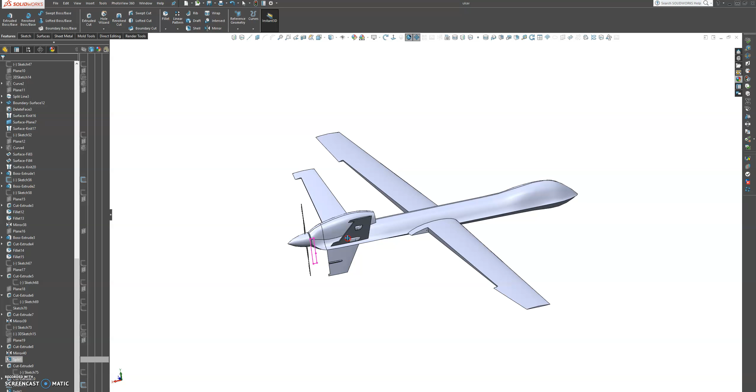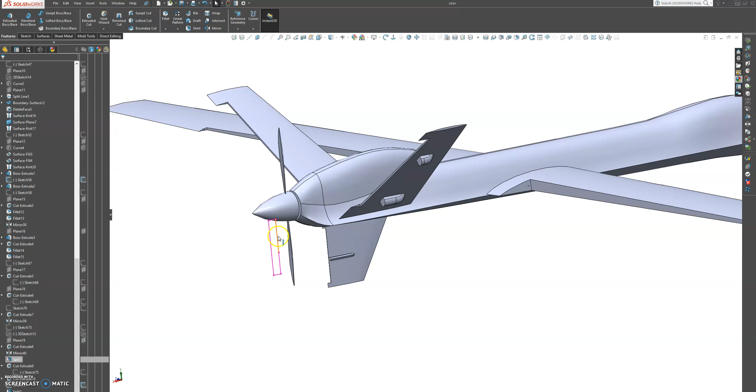Created our own individually split bodies, and then we finished off with creating the split bodies for the rotor flap. Let's hide this sketch here. And then I did extrude this into this body.

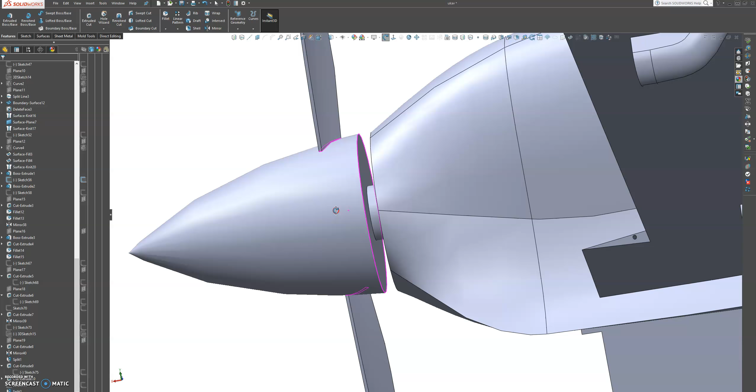However, we're going to do something different because we want this to be able to spin around its axis when we get to animation. So we're going to sketch on this surface quickly, and sketch on that one, and then grab a circle and get that point there. I'm going to bring it out bigger than that one was originally, and then go to extrude and get that piece of body off from there.

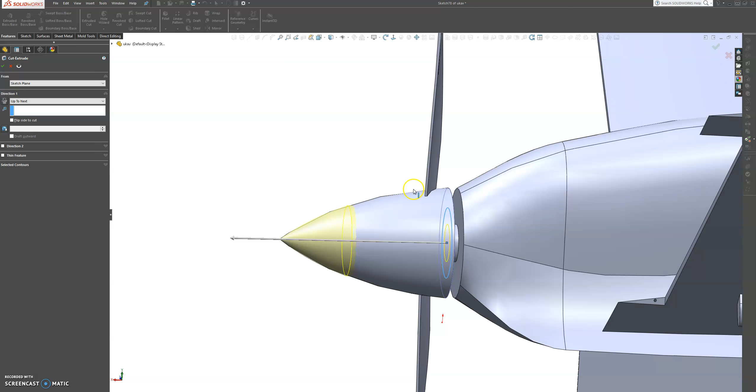So we're just going to go up to next. Reverse, that's good. Let's see. Oh, we went all the way in, didn't it? Let's come out from this. Okay, so let's do it again.

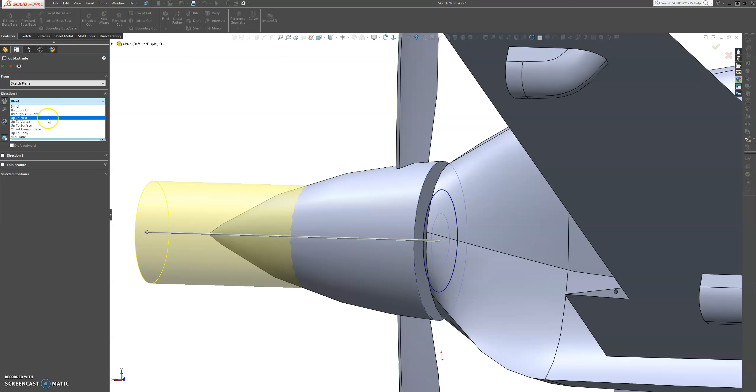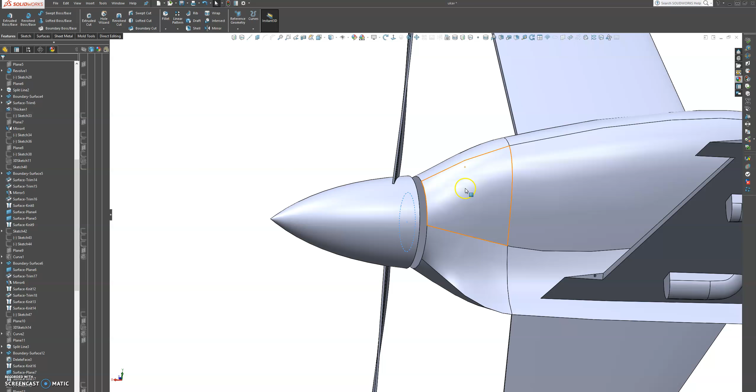Let's go to cut extrude, and we go up to surface. We're just going to go up to this surface here. That is good. Up to that surface, and then press OK. That's good.

And then we're going to come back over here, and then create another sketch on this one. Let's come out here. Let's come back in here. So let's create another sketch. Let's grab that point, so that's the point we're looking for. Come out about that much.

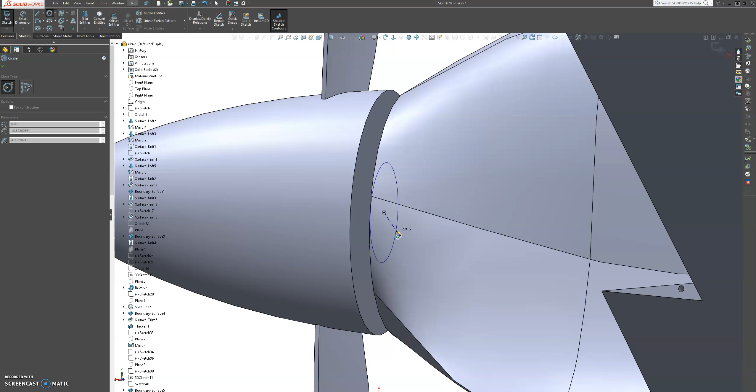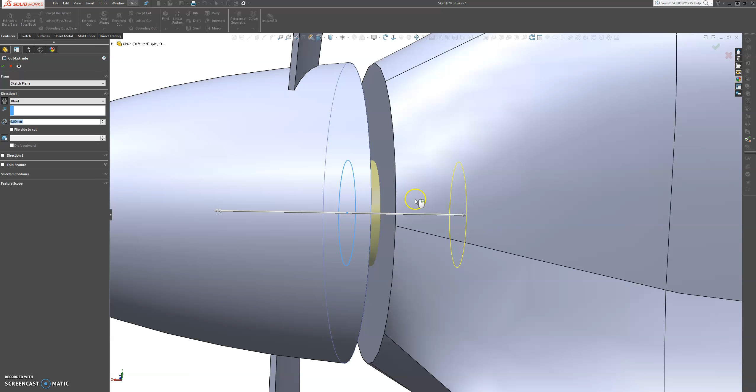And then we're going to extrude cut, just so we can get our hole to create our mates. So we're going to go in about that much. Okay.

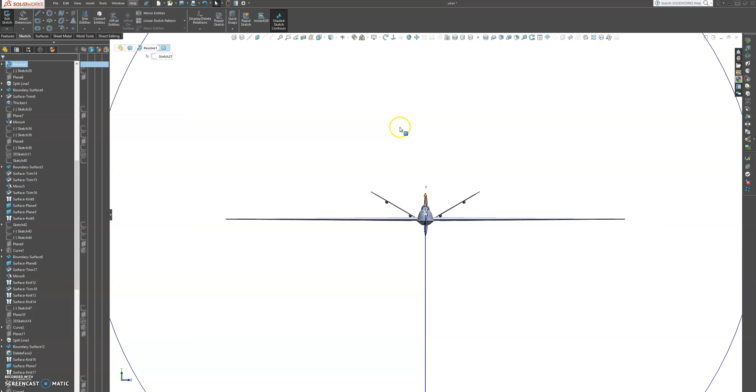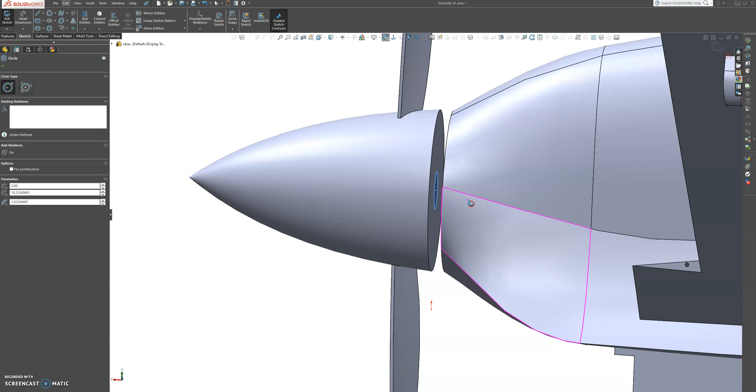Right, and then we're going to make another sketch, and sketch again on this face. It jumps out. Come back in here, a little bit out, and let's grab that point again. So just hover over the edge, and it gives you that perfect center point. And we're going to come about that much, and that's going to be perfect for creating our coincidence.

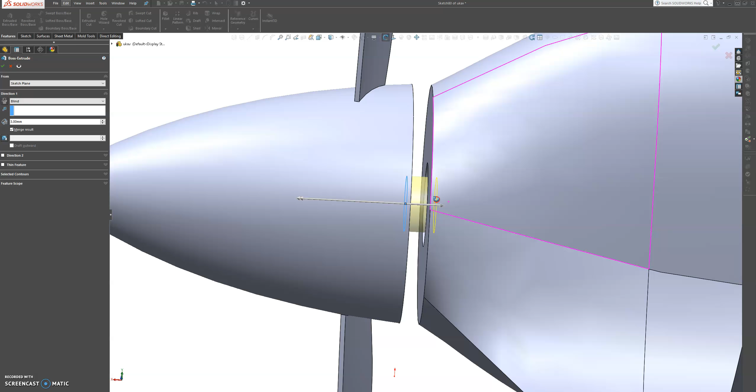Okay, and then we're just going to go to extrude, and then let's come back about here, and that's good enough. So press OK on that.

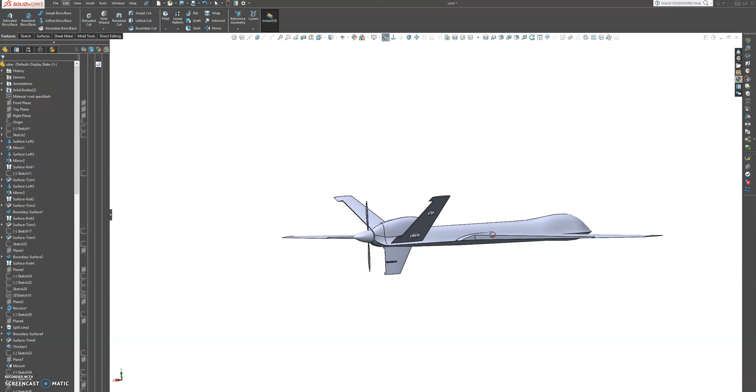And now we need to create into a separate body. So let's sketch on - I don't know if we have that kind of plane - that is a bit more over at that one. So let's create a plane quickly here before we head over to assembly and check our flaps if it's working. So we're going to grab a front plane, flip the offset, and then raise this out about that far. That's good.

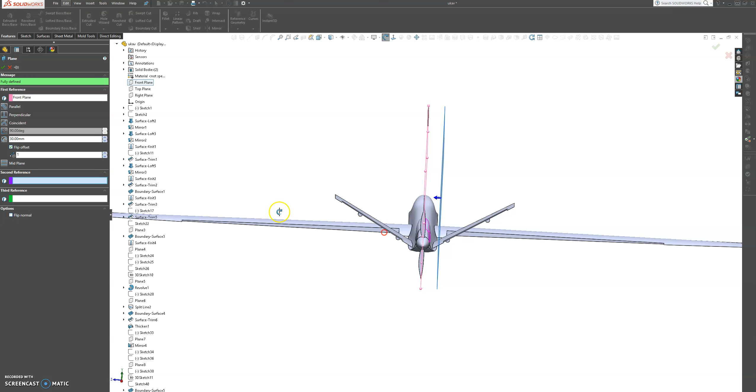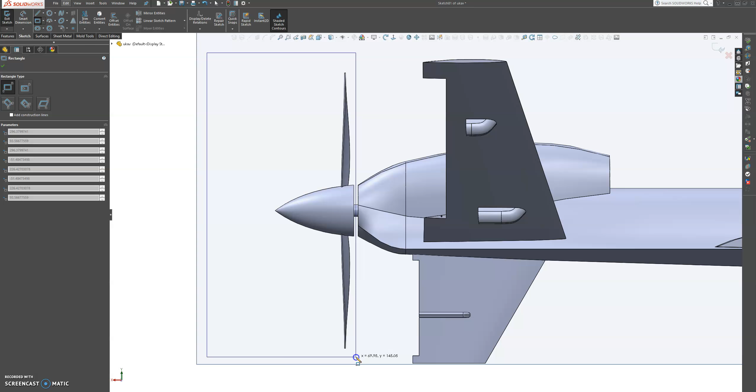And then we're going to come in here and make a sketch on this one. Flip it over - doesn't really matter at this point, but I like to sketch from this end to this end. Somehow it's comfortable for me; for you maybe from this end to that end, but you'll figure it out. So let's choose a corner rectangle here, and then sketch from here, and go all the way down here, something like that.

Okay, and then we're going to split these bodies. So let's grab split. We already have our split tool determined, so we're going to go to cut bodies.

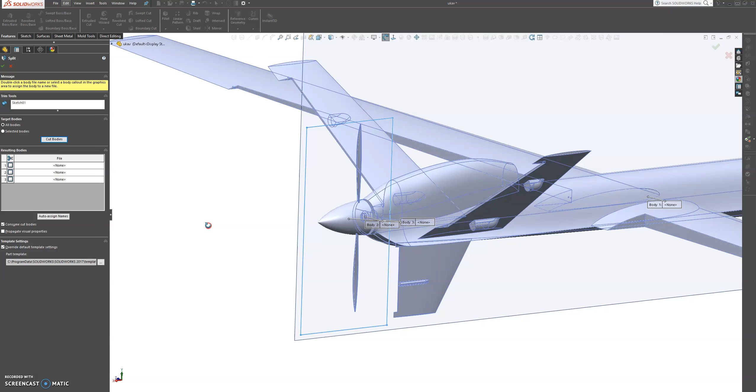Okay, and now we just need to select our bodies that we are going to cut. So we're going to need one - no, that's the plane. We're going to need number 2 and number 3. Actually, we're just going to need number 3, and we don't need number 2.

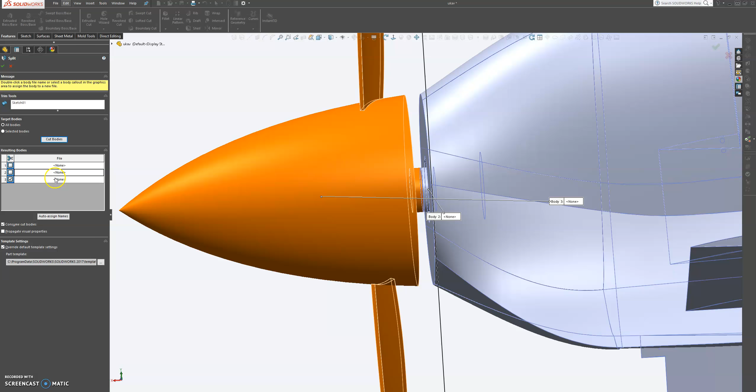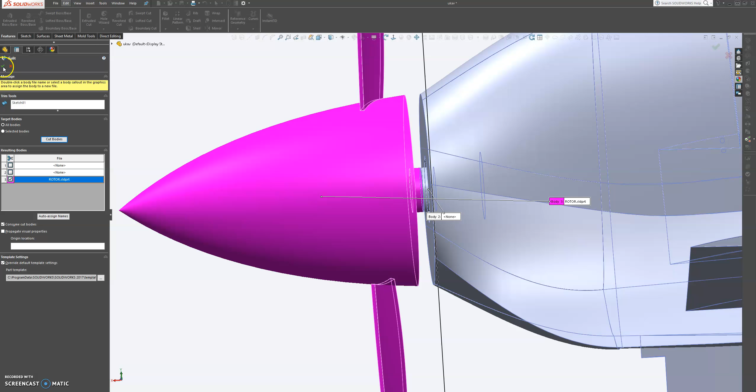Right, okay, so let's name that the rotor. I'm going to save it to desktop. Save. Okay, I'm just going to check that. And it will consume the body, but we can always bring it back.

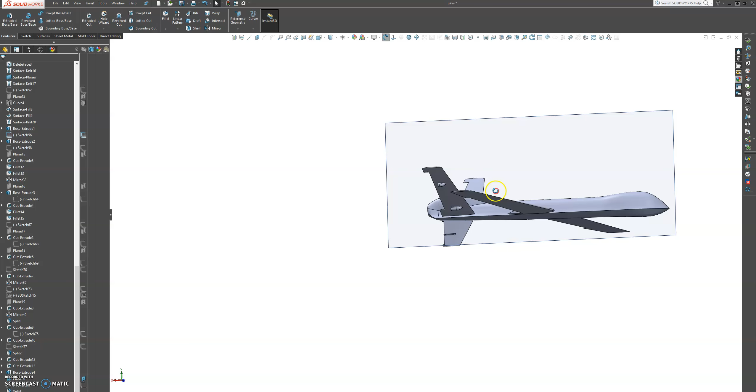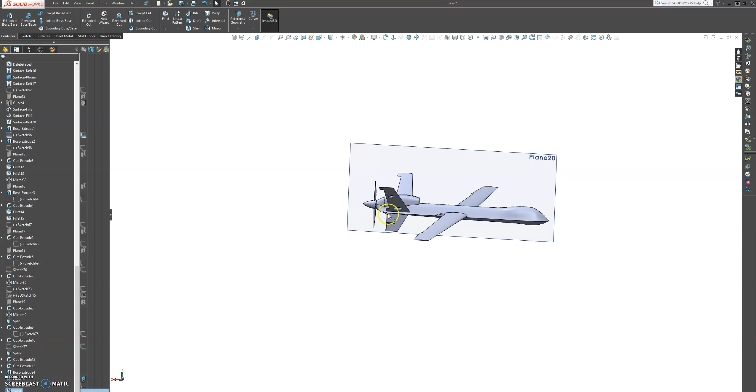Okay, so that's created. Let's hide the sketch here, and hide that. So if you want to see the rotor here, you can just go back to split line and then edit, and then you just check 'do not consume the bodies', and then press OK on that. And this will update it. Okay, so now you can see the rotor. Alright.

But when you head over to assembly - before you head over to assembly - it's a good idea to consume it, and when you come back you bring it back so you can see your rotors. Okay, so what else can we do before we head over to assembly?

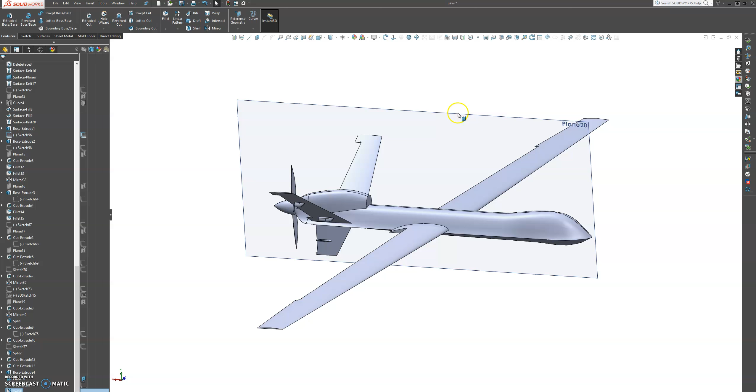Let's head over to assembly right now, and when we come back we continue with our further designs of hollowing out our turbine and adding the additional moving housing, mechanical housing, the antennas, communication devices, and all the other bits.

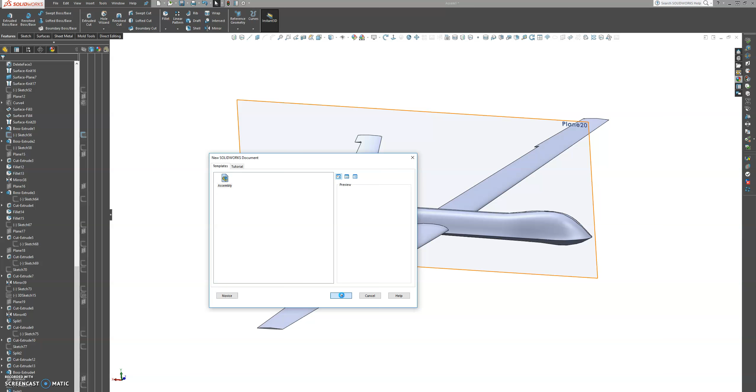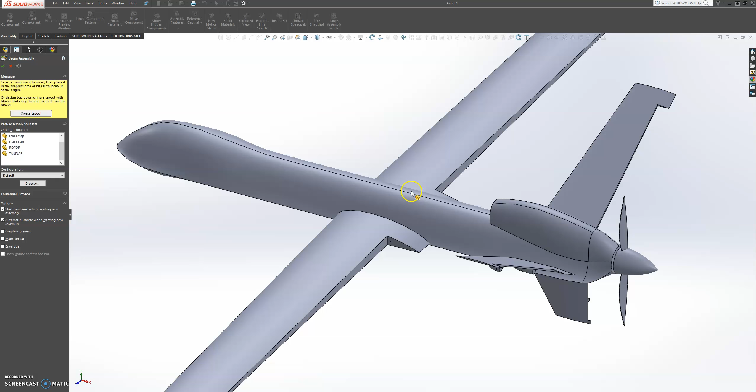Let's grab our plane. You see the rotor is present because we didn't press consume, so let's exit that and jump back quickly. Don't save.

Let's go back here to split line, let's edit this one, and then we're going to go consume the bodies. Press OK.

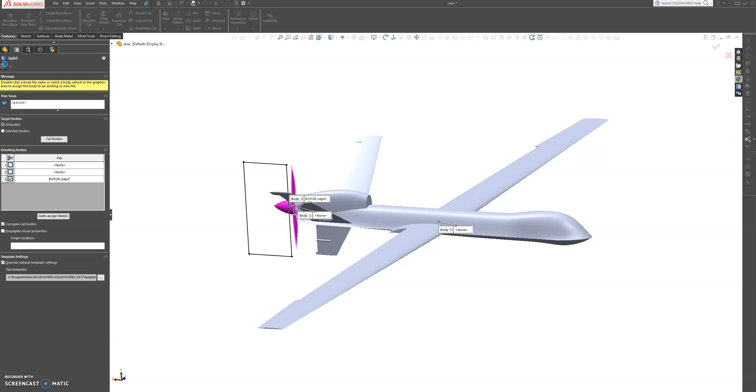Alright, perfect. Now let's go back to the assembly. So make assembly, and in the assembly you can create some minor animations. It's not really an animation software, but you can do some good animations here.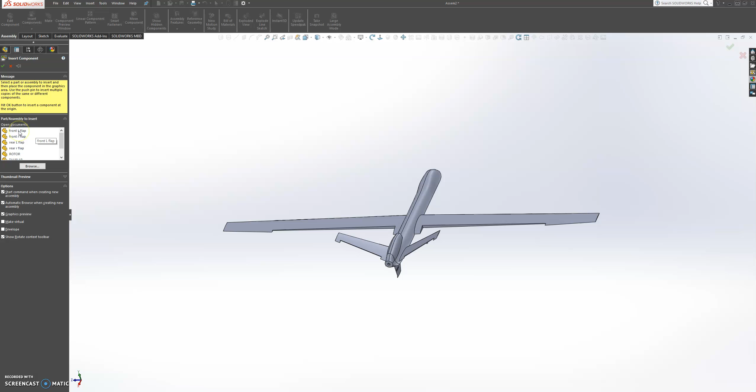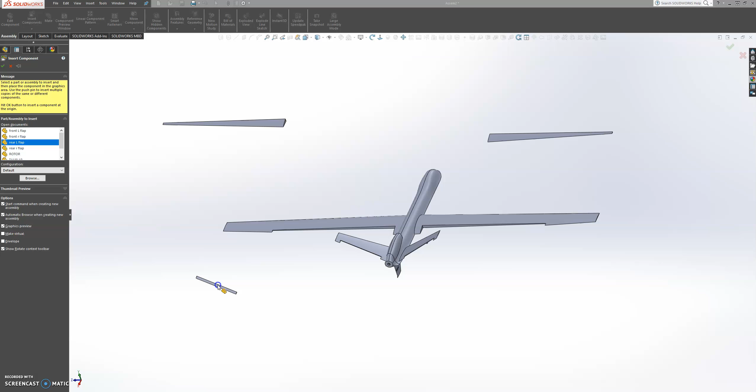Let's grab our drone, and then let's grab our flaps. So insert components: front left flap, front left flap, leave it there. Then insert components, front right flap. Then insert components, rear left flap, which goes here. Insert that, and then rear right, which goes here.

Insert component. What else do we have? We have the rear, we have the rotor comes back here, and then we have the tail flap, which will go over here.

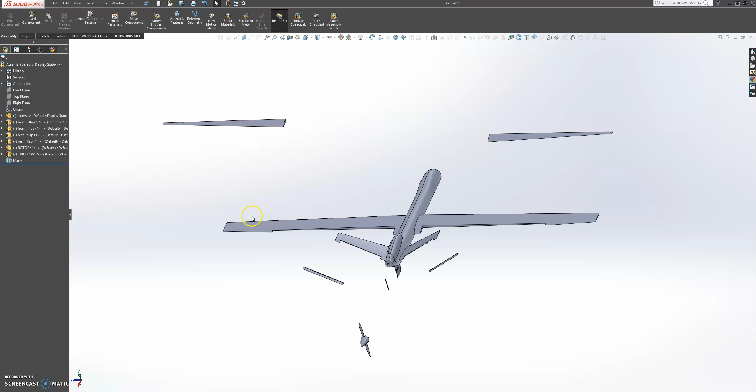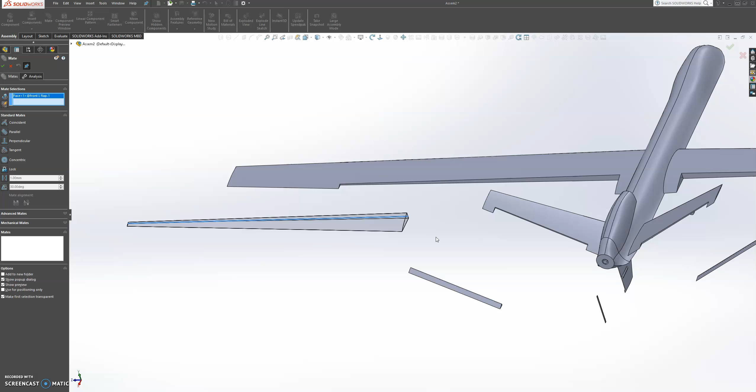So let's start by adding these mates. Click on here to add these mates. Let's clear that, it's selected by accident. Let's choose this inside circular face, and let's choose this over here. Wait for this to show up, and then we're going to press OK on that.

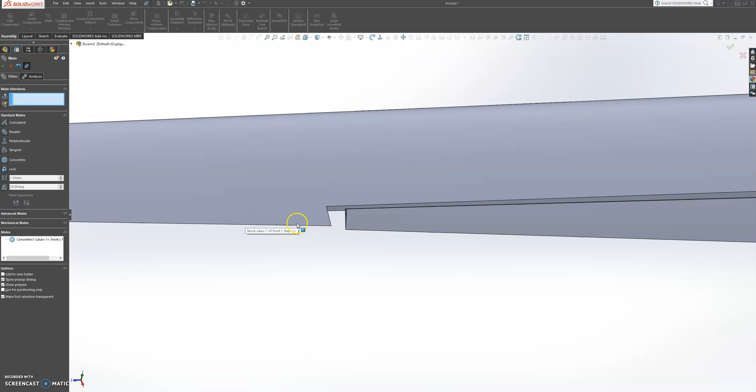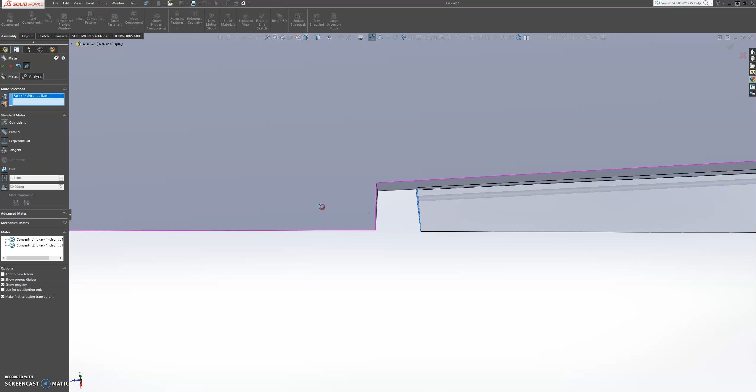Let's bring it a little bit closer, and then add our mate to this end. Let's turn it a little bit, yes, this end, and then this hole here. Press OK on that. And we're going to add our last relationship to this face and this face. Press OK on that.

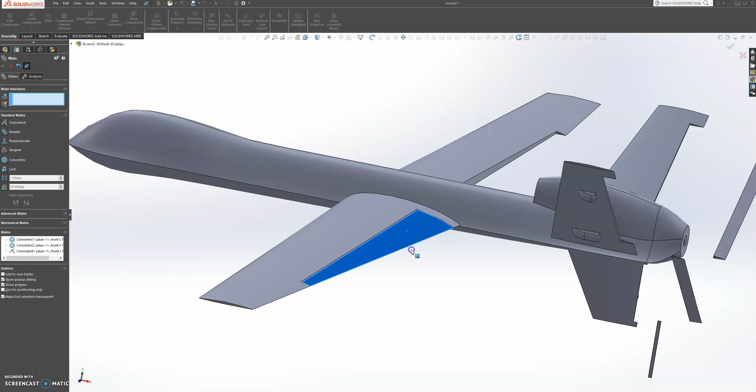Let's check if this flap is moving up and down. It's moving perfectly, up and down. Let's leave it straight in that, and then we're going to make the same thing for the other side.

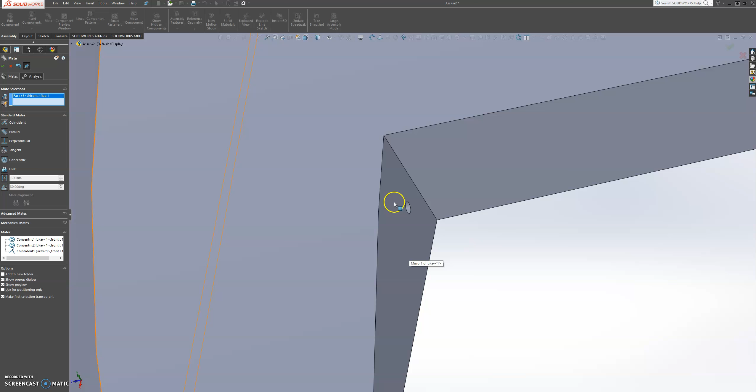So let's add our mate to the circular profile face, you can call it that, and this one here, this face. Press OK on that, and then move it a little bit to its position.

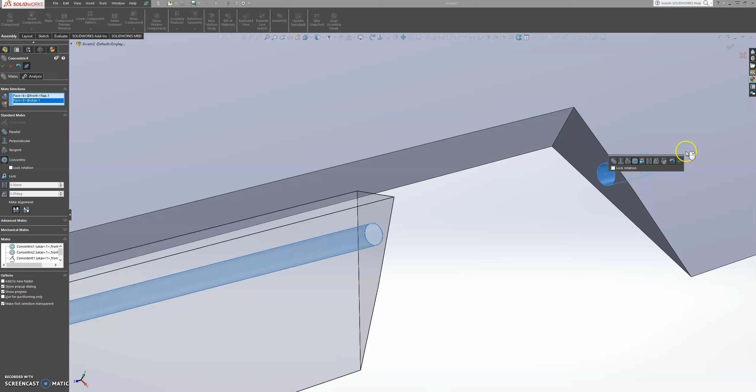Let's go in here and quickly add our relation mate to this and this, then press OK on that. Our last mate to this face and that face brings it into place. Press OK on that, and then check if it's working.

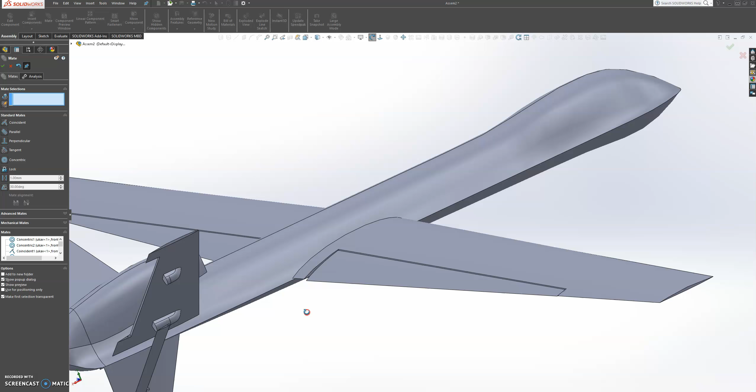Indeed, because it's perfectly designed. Let's align this too. Now we're going to add our relations to the rear flaps.

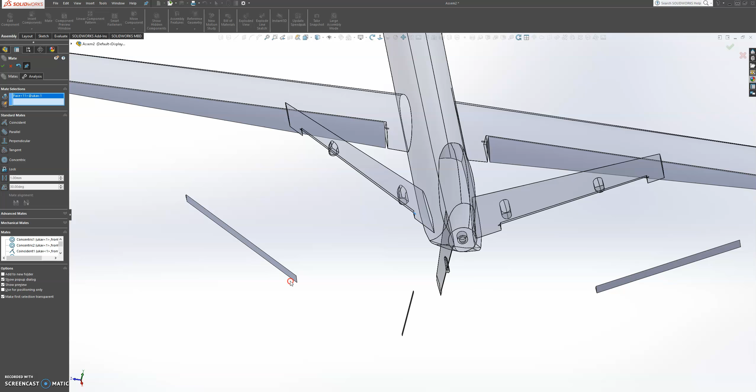So again, same thing. We're going to add our first mate to this circular profile and this. Press OK on that. Okay, where did you go? Right there. Okay, so let's move it into position.

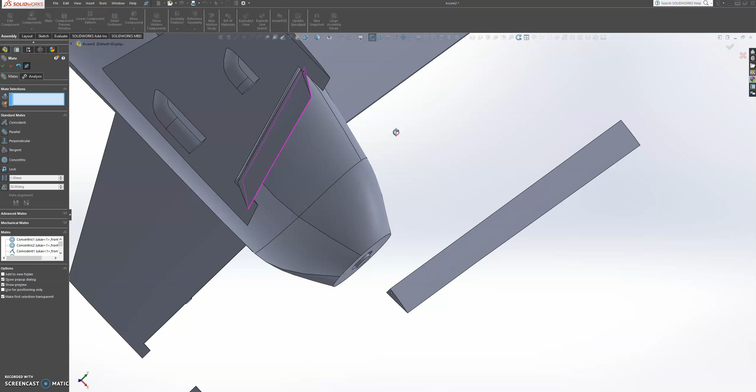It's working already, this plane wants to fly away. So let's choose this profile. Let's see if we can have a look in there. It's this profile, just OK on that.

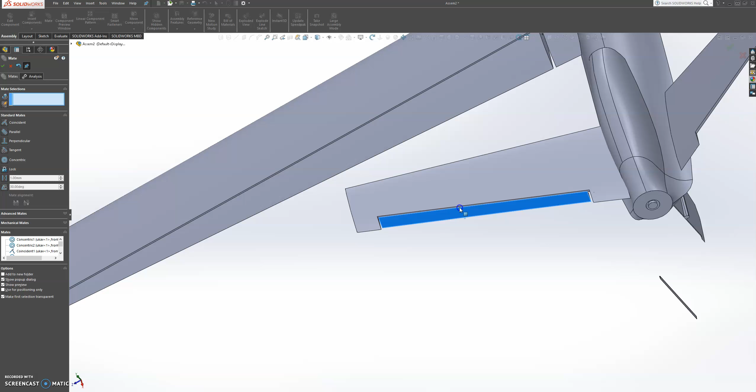Right, so this flap is moving. However, we need to create some good relations. I think we should have cut it straight, as you can see, because we added that one now. We need to take that out, take out the last mate we just did, because it's not a straight cut.

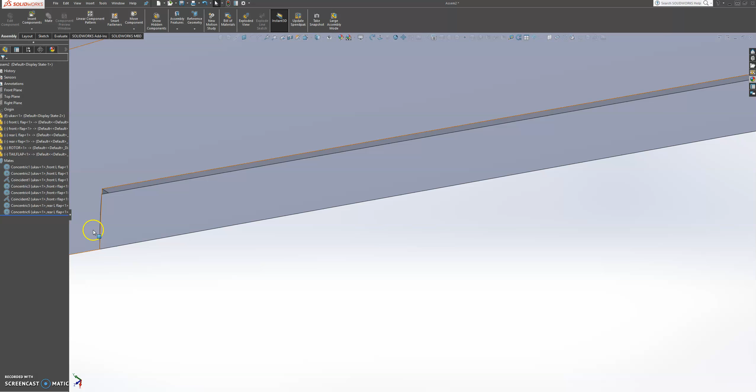For that reason, it's not gonna be doing any good for us. However, we will go back into the design and create some flat surfaces for these edges, so we can create that mate. Okay, so I'm gonna leave this.

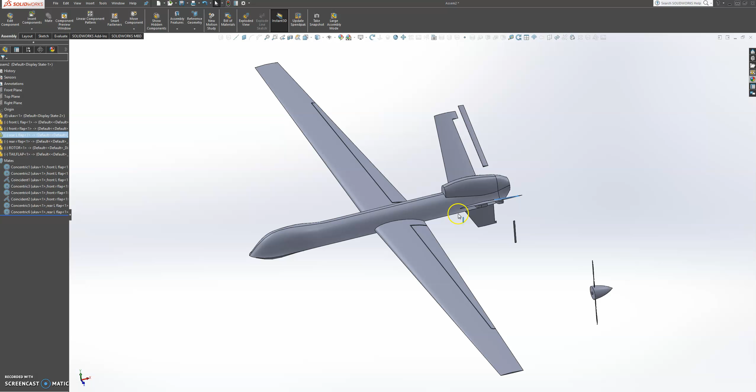I'm going to leave this tutorial here, and in the next tutorial we'll continue with adding our mates and adding a motor to this rotor here, so we can actually see it spinning around. Okay, thank you, bye bye.